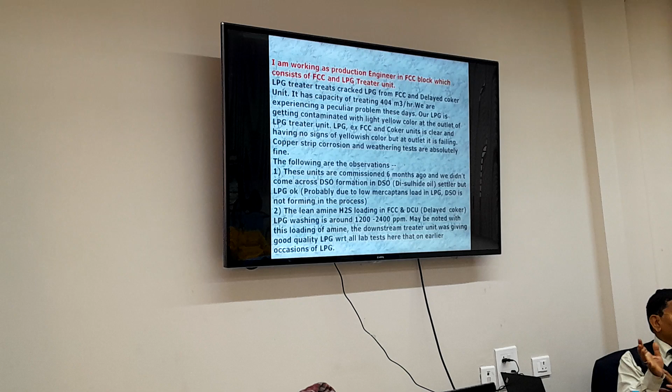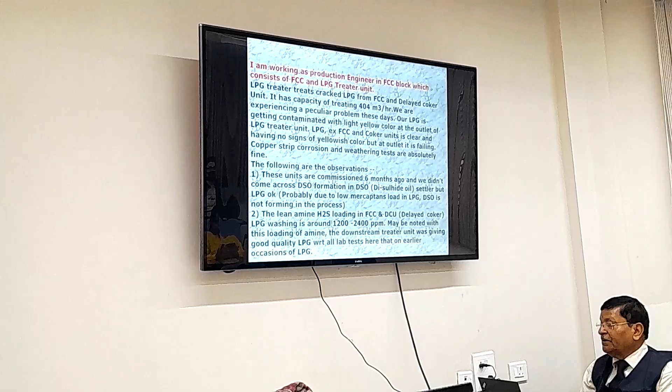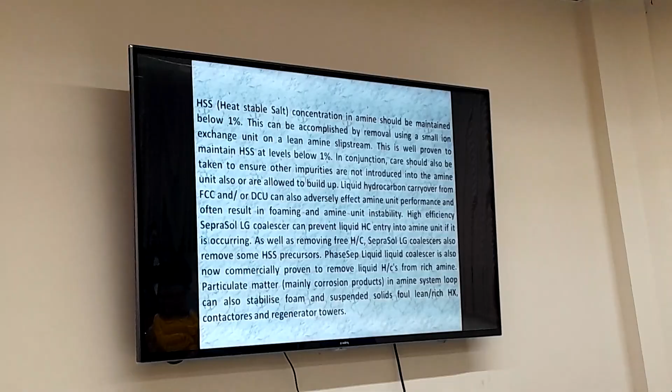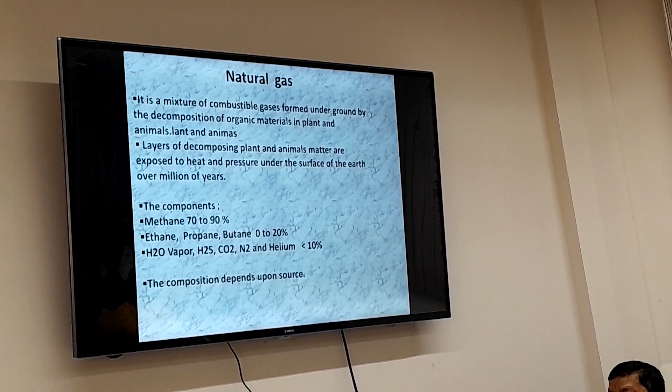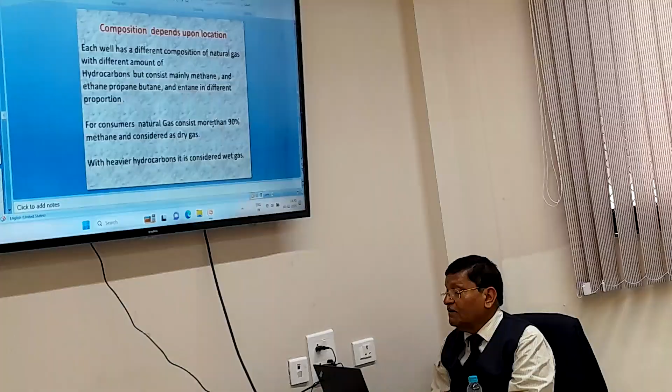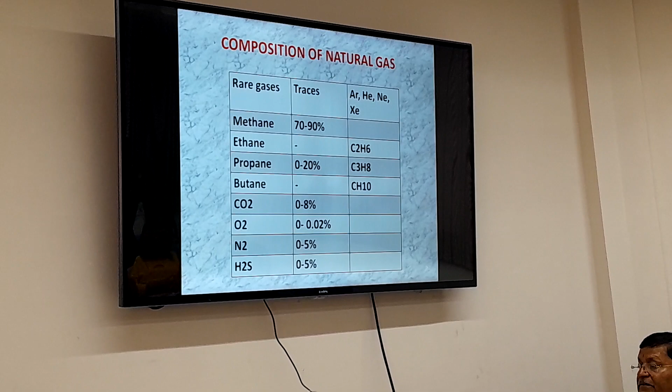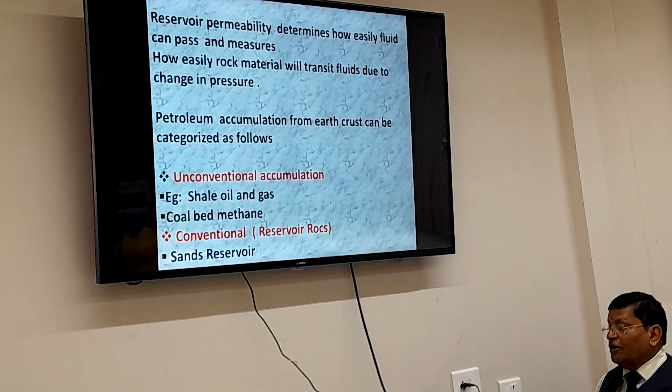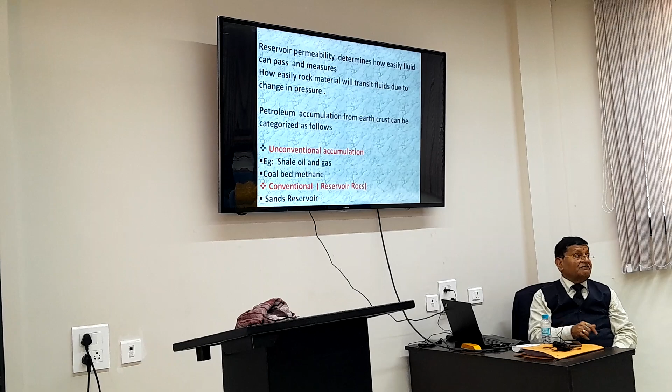Now, source are rocks rich in organic matter. Source, how easily rock material will transmit fluid due to changes in pressure. Petroleum accumulation from earth crust can be categorized as follows: unconventional and conventional. In unconventional are your shale oil and gas, coal bed methane. Conventional is your reservoir rocks, sands and reservoir rocks.

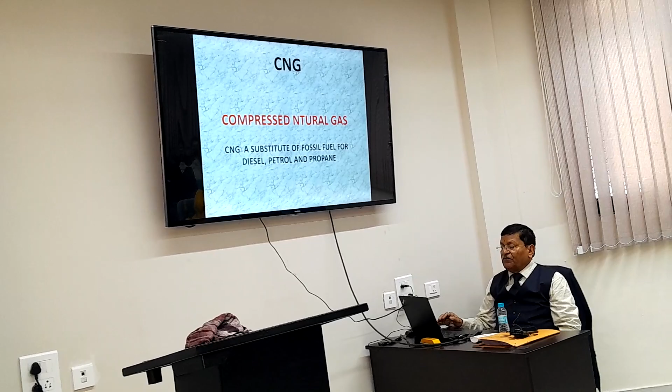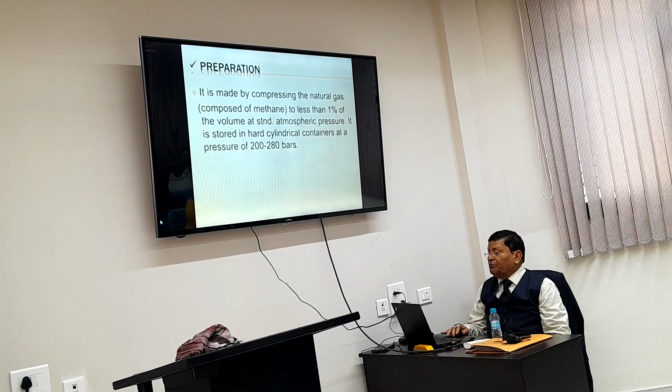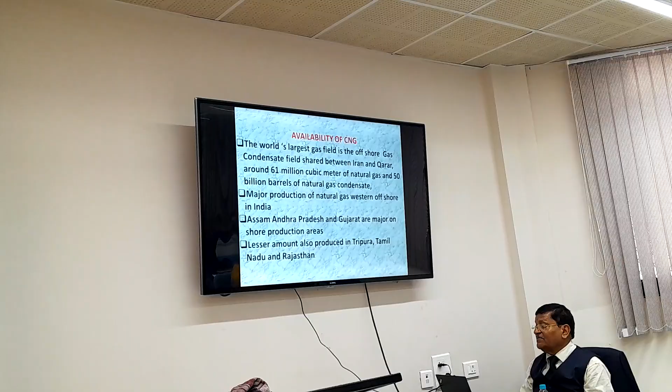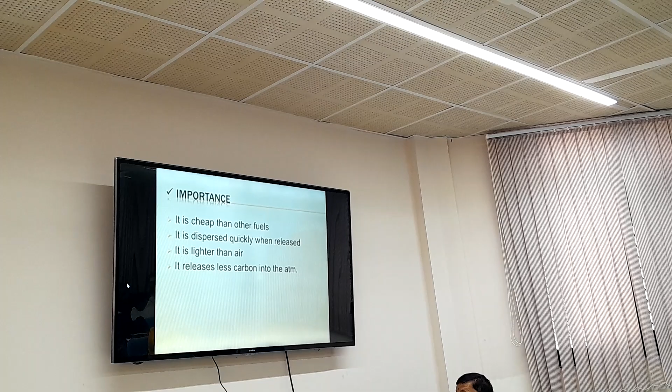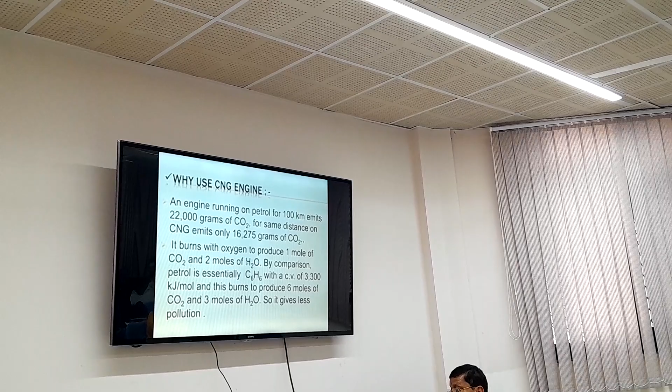Major production of natural gas is western offshore in India; Assam, Andhra Pradesh and Gujarat are the major onshore production areas. Lesser amount is also produced in Tripura, Tamil Nadu and Rajasthan. This is our indigenous production of natural gas. Importance: it is cheaper than other fuels. It is dispersed quickly when released. It is lighter than air. It releases less carbon into the atmosphere.

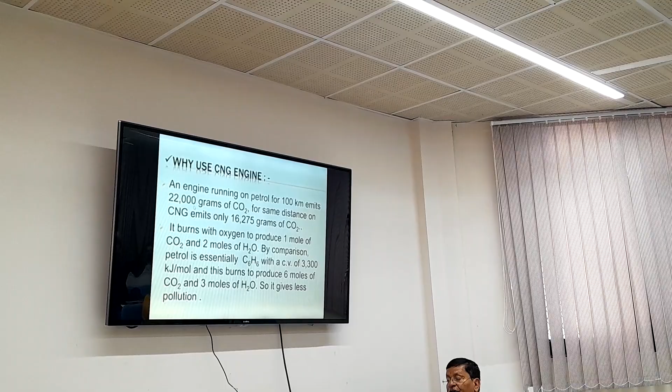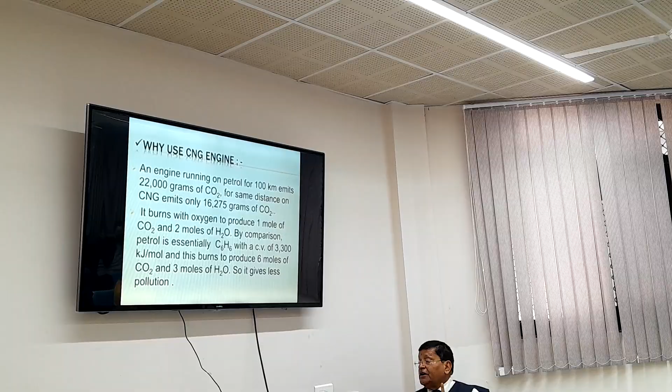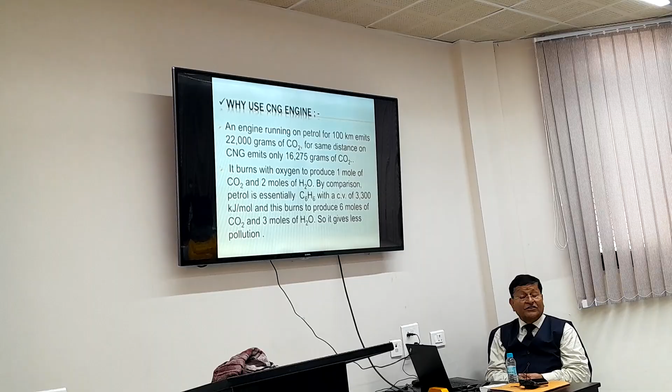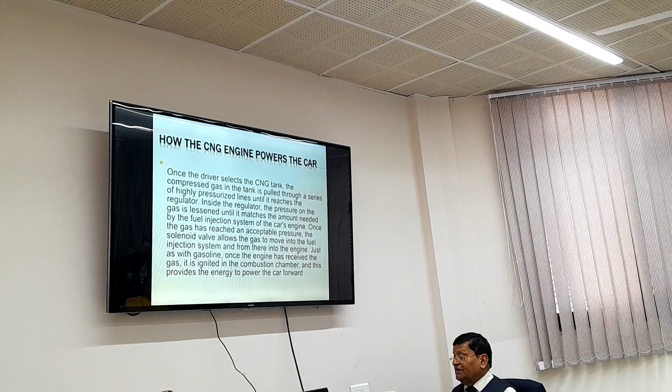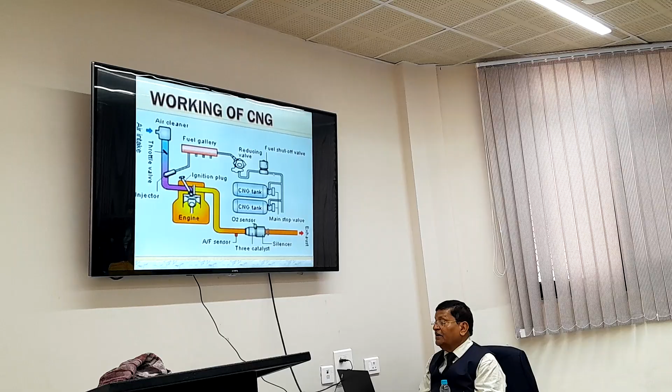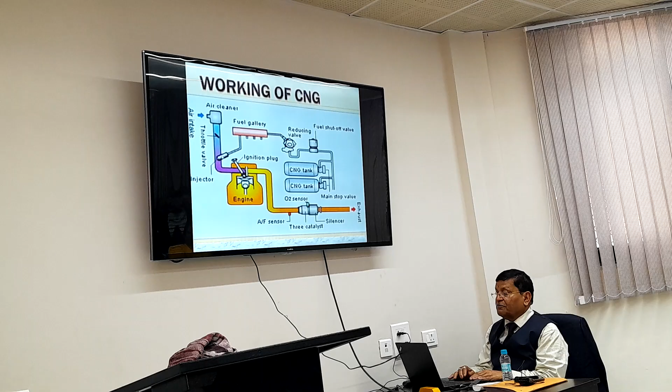And you see, this is a diagram where this is the engine and this is the CNG tank. From CNG tank, the fuel shut-off valve that you can shut off, you can run on the dual system on gasoline. Now, when you open it, it will be reducing the pressure. Then the fuel gallery, the fuel is going to the spark plug, where injector is there, it gets spark. This is throttle valve.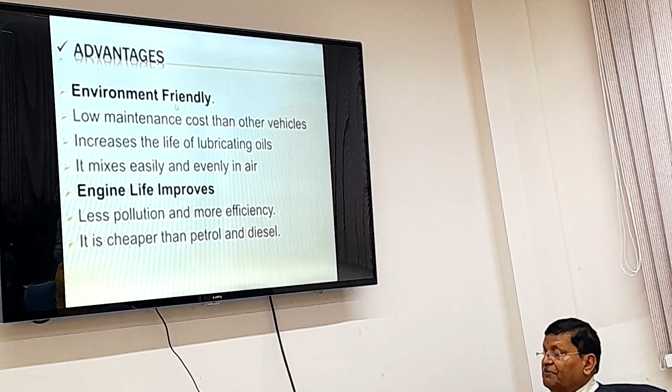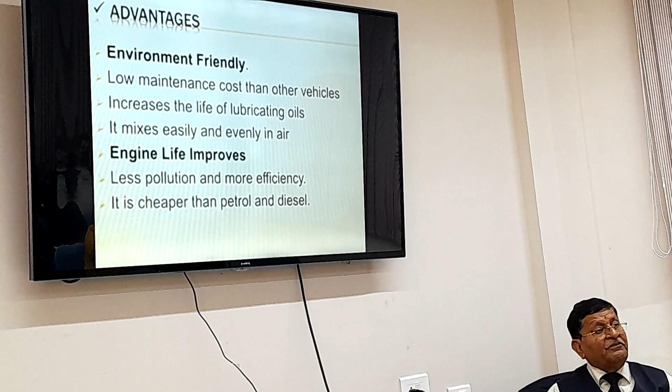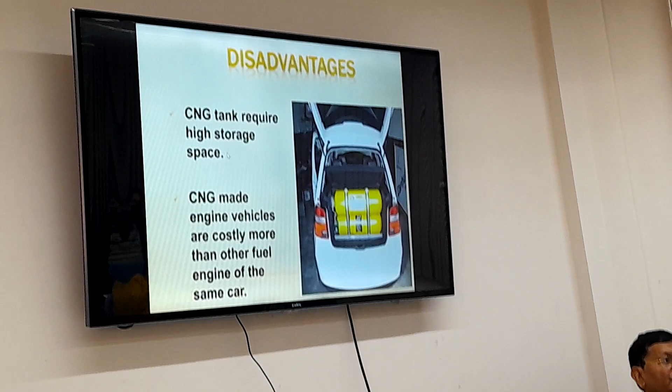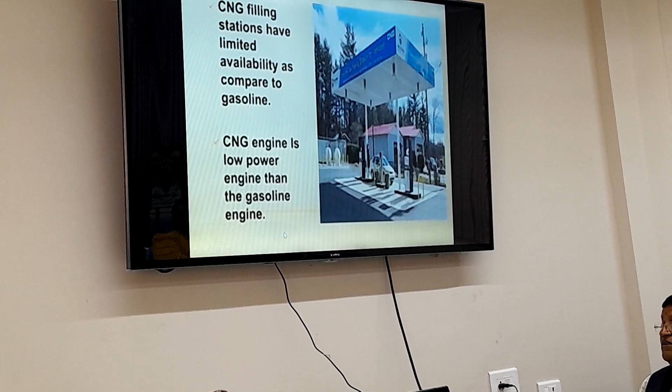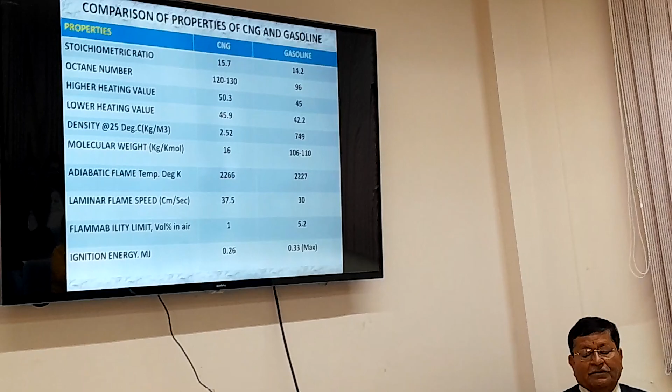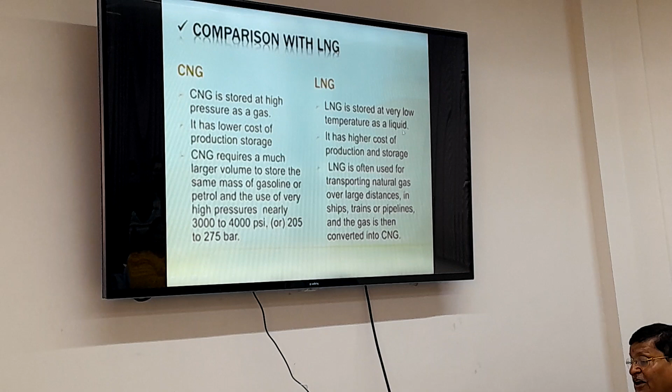CNG filling stations have limited availability as compared to gasoline. Not in every city you will find. And the gasoline. Now, what cost of production and storage? LNG is stored at very low temperature as a liquid; it has higher cost of production and storage.

CNG requires a much larger volume to store the same mass of gasoline or petrol, and the use of very high pressure, nearly 3000 to 4000 psi or 205 to 275 bar. LNG is often used for transporting natural gas over large distance in ships, trains or pipelines, and the gas is then converted into the CNG.

This is the difference. Conclusion: due to these above reasons, CNG is most useful for vehicle as a fuel to reduce the pollution, and it is cheaper than other fuels like petrol and diesel. CNG is attractive for the reasons it is clean, it is safe and available technology, it is the only fuel cheaper than gasoline or diesel, it produces lower air pollution. This is all about this gasoline.

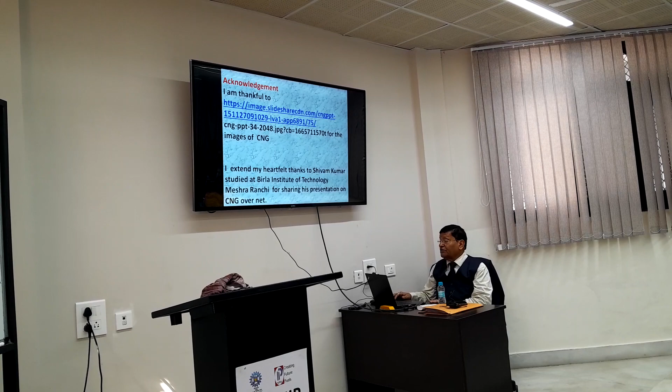Some of the slides you are seeing, I have taken from the presentation. This is available on the net, and these images I have taken from the presentation by Mr. Shivam Kumar of Birla Institute of Technology, and this is all about the CNG. Clear?